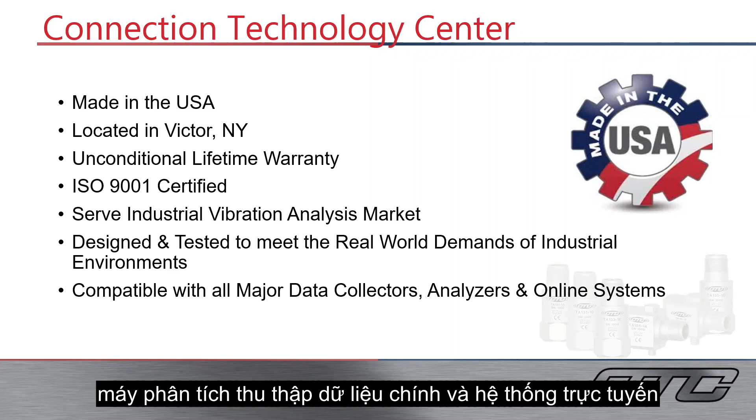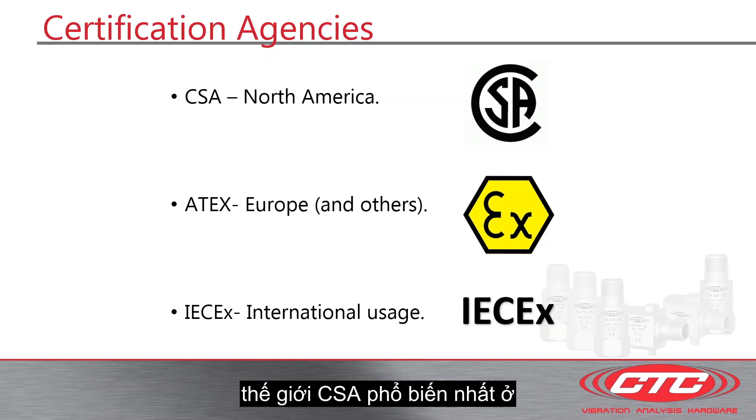Throughout this presentation, we're going to go over the certifying bodies, classes and divisions, and proper installation of hazardous materials. CSA, ATEX, and IECEx are the national certification agencies located throughout the world. CSA is most prevalent in the United States and North America, ATEX is most prevalent throughout Europe, and IECEx is located anywhere internationally that doesn't have its own primary body.

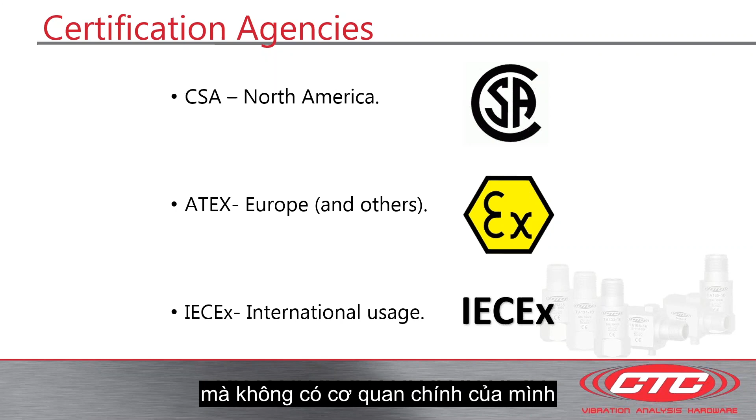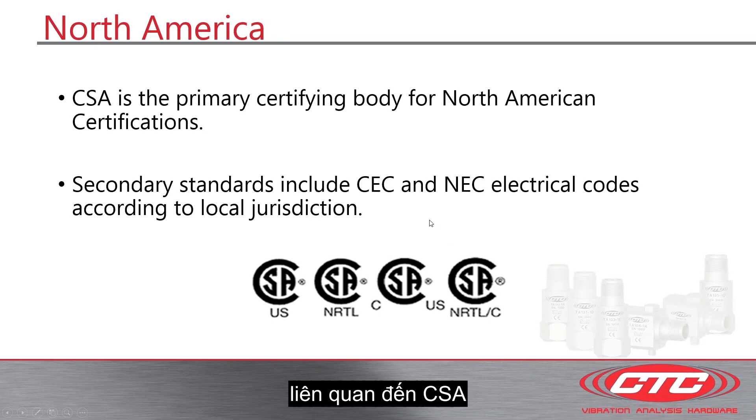CSA is the certifying body for North America. Secondary certifications include CEC and NEC electrical codes. Below you will see a couple of the logos associated with CSA. ATEX is the primary directive located throughout Europe. It is similar to IECEx with a couple of minor differences, and it is EU compliant. Here are the logos you will see associated with ATEX.

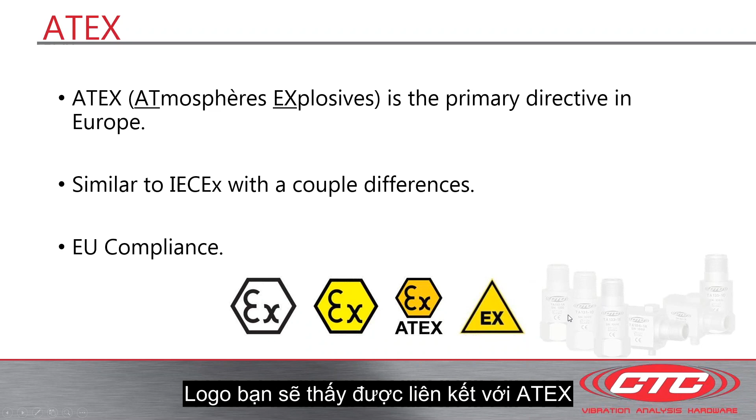IECEx is the default certification for any country without a primary certifying body. It is the internationally accepted means of complying to IEC standards. IECEx variants include ANZEx, KC, and PESO certifications. If you have other certifications within your country that are not listed, please contact your local CTC manager.

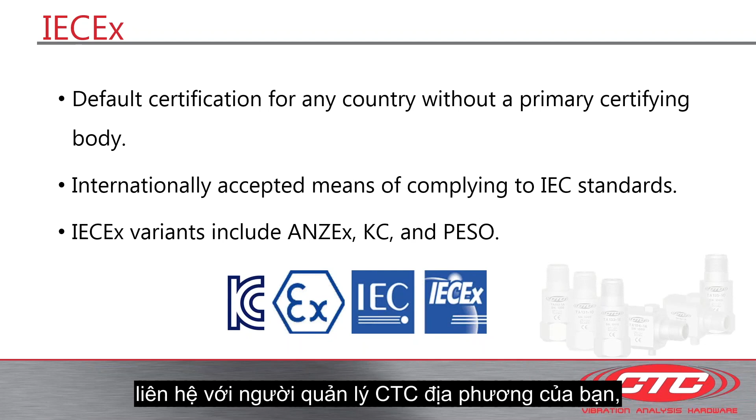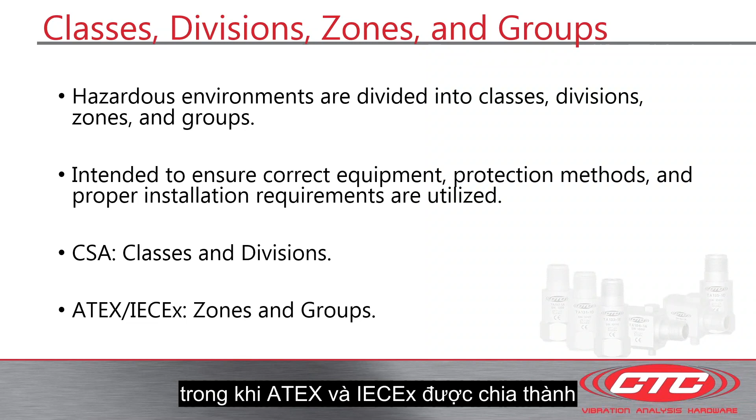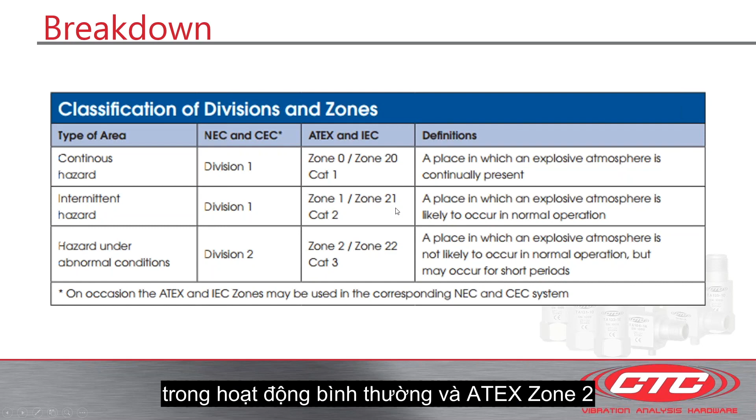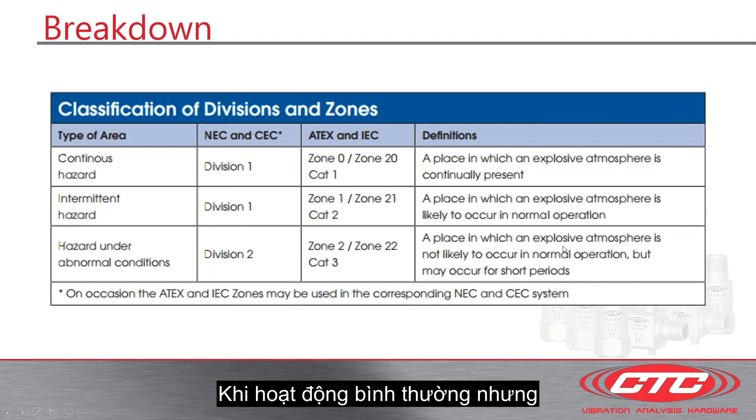CSA and ATEX divide divisions and zones slightly differently. Division 1 is classed into two zones, whereas Zone 0 and Zone 1 are classified in the same. Division 1 is a continuous hazard. That's a place in which an explosive atmosphere is continuously present. ATEX Zone 1 is an intermittent hazard, a place in which an explosive atmosphere is likely to occur in normal operation. And ATEX Zone 2 and CSA Division 2 is a hazard under abnormal conditions, a place in which an explosive atmosphere is not likely to occur in normal operation, but may occur for short periods.

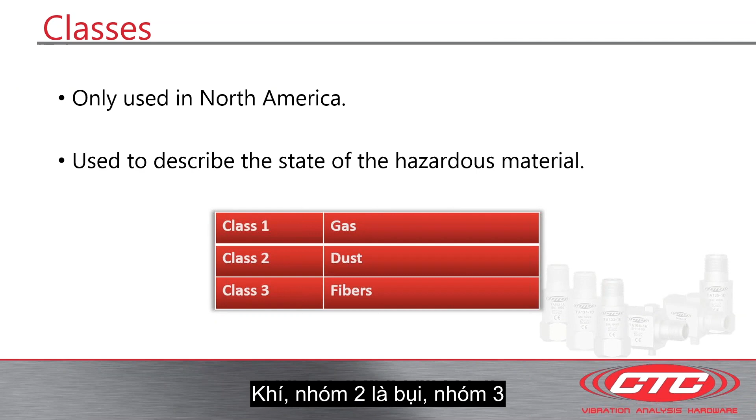Classes are only used in North America in CSA's ways to describe the state of hazardous material. Class 1 is a gas, Class 2 is a dust, and Class 3 is a fiber. Divisions are used in North America to describe how present a hazardous material is. In Division 1, a hazardous material is constantly present, and in Division 2, a hazardous material is present in a fault condition. If you look at the diagram over here, in Division 1, the hazardous material is constantly present. In Division 2, a hazardous material is present within a fault condition, meaning if this structure were to be damaged, if there's a crack, or if there's a leak, that hazardous material will be located in Division 2.

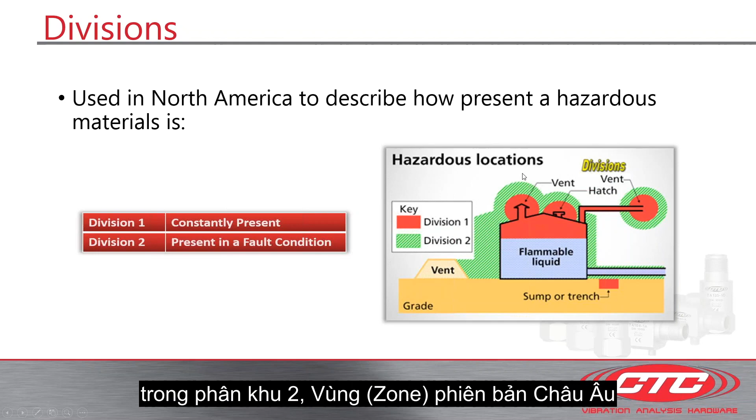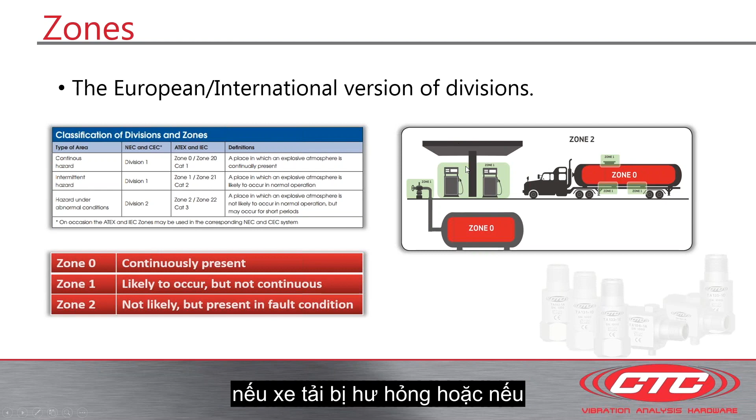Zones are the European or the international version of divisions. Zone 0, hazardous material is constantly present. Zone 1, hazardous material is likely to occur but not continuous. And in Zone 2, hazardous material is not likely but present in a fault condition. If you look at this diagram, the fuel truck Zone 0 is carrying fuel, meaning there is a constantly present threat. In Zone 1, at the hatch up here or down here on the fuel truck, the hazardous material is likely to occur but is not continuous. So if one of those hatches are open, that hazardous material is occurring. In Zone 2, which is the surrounding area, hazardous material is not likely but is present within a fault condition, meaning if the truck were damaged or if one of the fuel pumps were damaged while pumping gas, Zone 2 would have a hazardous material present.

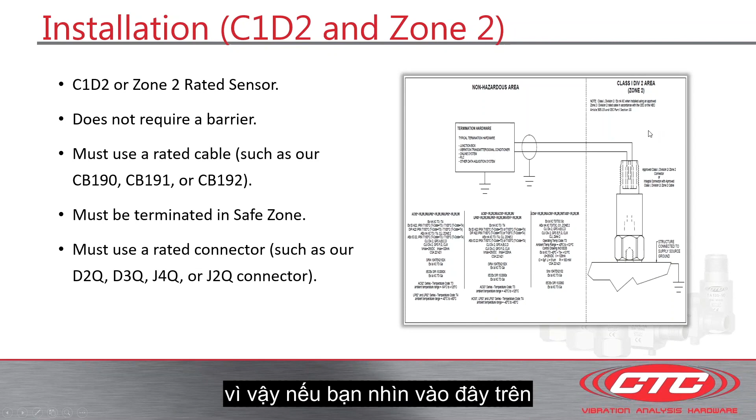In a Class 1 Division 2 or Zone 2 installation area, you must use a rated sensor for that zone. You don't have to use a barrier, but you must use a rated cable or connector, and you still must terminate in the safe zone. So if you look over here at the diagram, you can see it's a Class 1 Division 2 area or a Zone 2 area. The sensor is installed over here, and your termination is made in your safe zone, whether that's your junction box, a signal conditioner, online system, or PLC of some sort. It must be done in the safe zone. You should always consult your local jurisdictions to make sure you're following all rules and regulations for your installation zones.